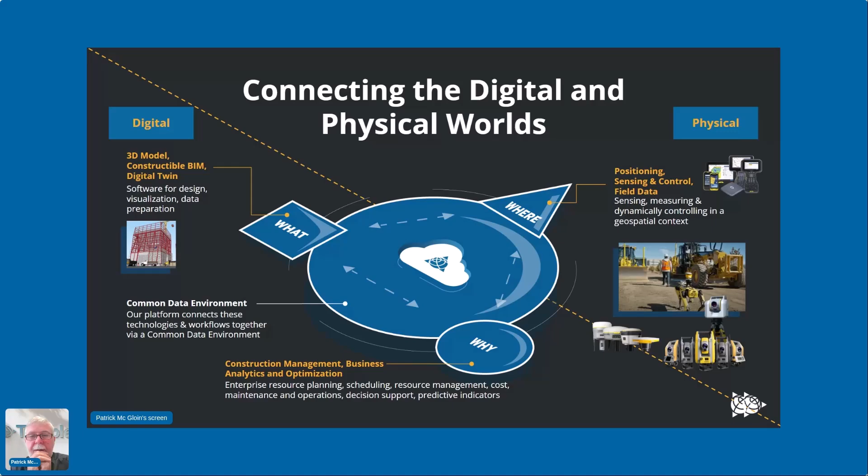Digital to physical. From Tekla Structures, data can be sent directly to fabrication to produce the design elements that are necessary, and then to ensure that those components actually fit in the field.

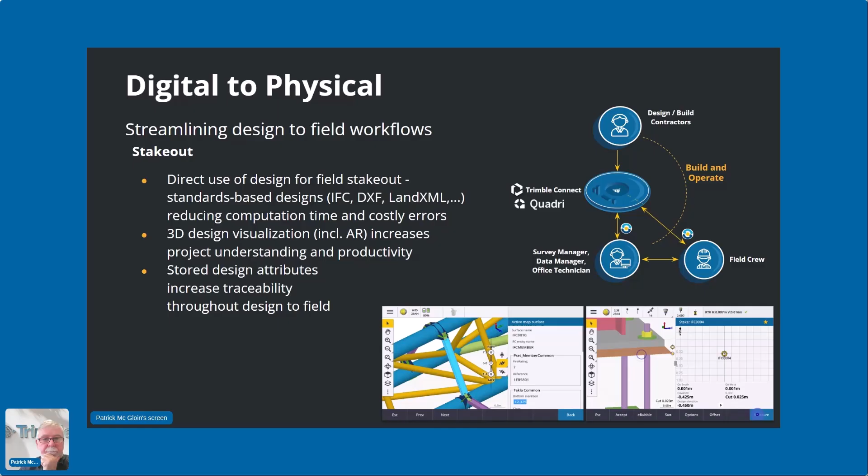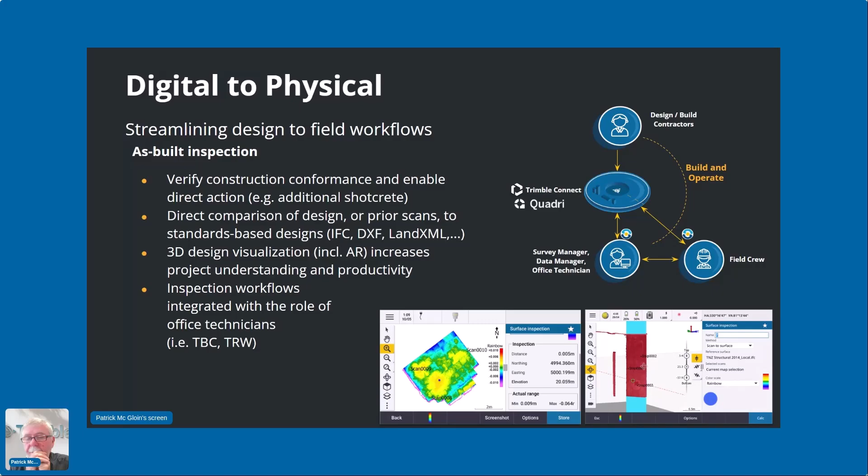Digital to physical, streamlining design to field workflows. Quality control of what we've designed as opposed to what has been built. Ensuring that the design objects that have been produced are accurately represented in the field. Sending solid information for bridges, for structures to the field, and extracting the necessary coordinates from edge lines, surfaces, or points directly from the solid objects.

And of course, this is a two-way workflow, physical to digital. As the construction proceeds, it's very important to control the data that has been, or the objects that have been constructed in the field, be it bridges, be it manholes, be it pipelines, be it cut and fill surfaces, and be able to...

...combine that with the design data, both offering augmented reality solutions, but also ensuring that the quality control of what is being constructed is in accordance with the design. Full data flow from physical to digital.

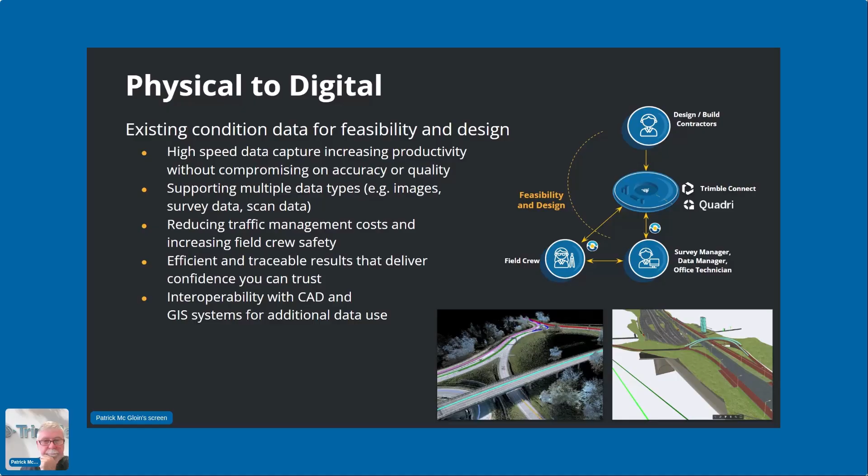And we're seeing now the use of the data, the design data, how that can augment the whole process in the field.

Offering model access of the relevant information that is necessary directly to the people working in the field. Ensuring that they're not overflowed with unnecessary data, but getting accurately the data that they need to do the job in progress, whether it's reinforcement in a building construction, or pipelines and manhole layouts in an infrastructure project. Again, ensuring that the correct data is in the correct place at the correct time.

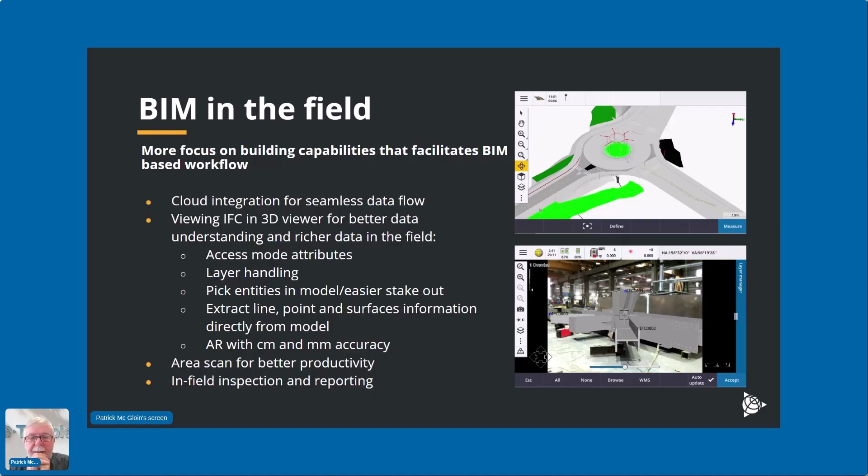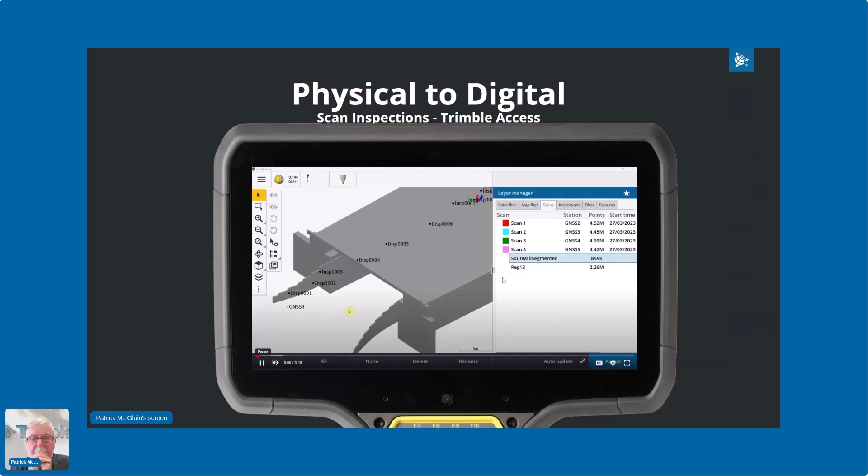Just a little example. So the ability now to accurately scan everything that's been constructed, take that scan data, add it to your model, and then control that what has been constructed is in accordance with what has been designed.

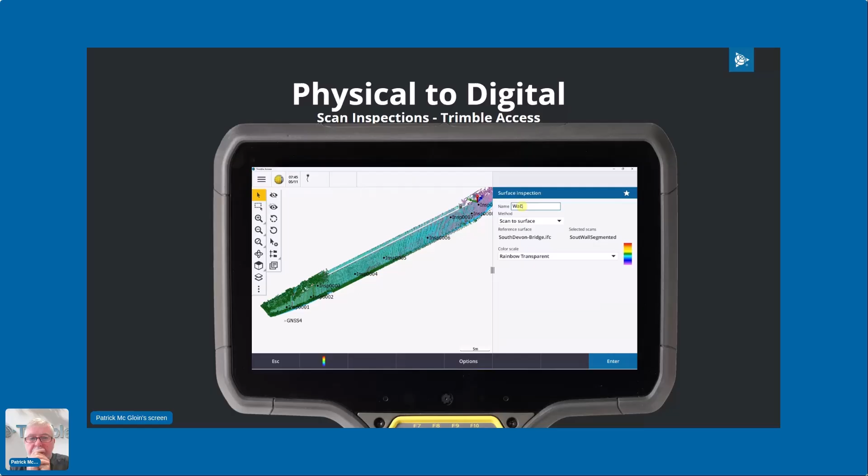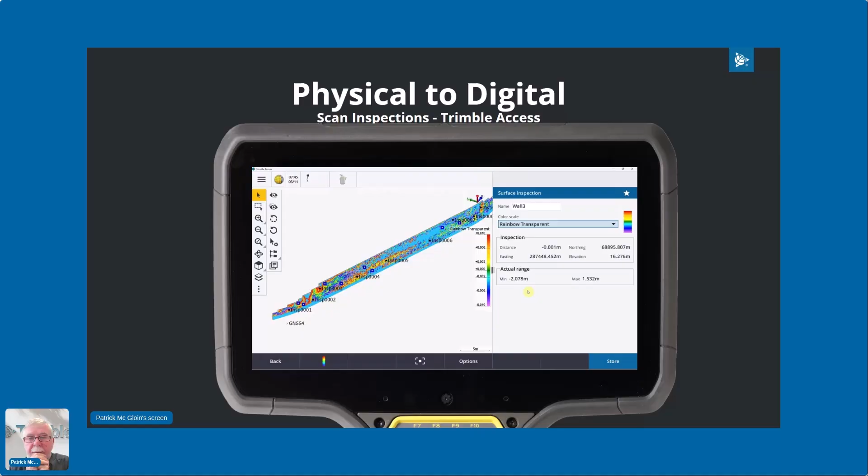And as we see this moving forward, providing the maintenance situation with models, giving them exactly the information they need. What is essential here is that the data available in the maintenance phase is of an accuracy that is required, but also easy to search and easy to visualize, so that there isn't a data overflow. The right people get the right data at the right time.

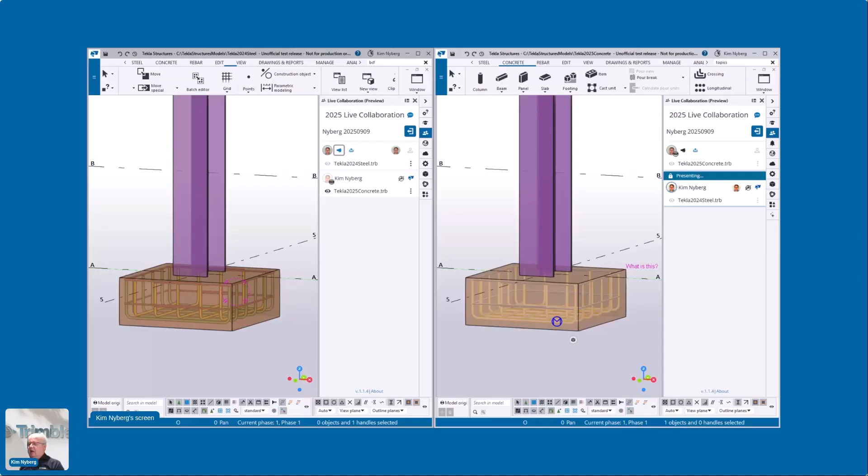One of the things we got early feedback on, I think last year, was that model sharing and live collaboration need to work together. We originally thought, why would you collaborate in real time in the same model? Because we already have a solution for that called model sharing, which allows you to work offline and then synchronize your changes.

But there was actually a need to do this as well. You could technically do it already, but the problem was that when you shared the same model in the same live collaboration session, you had your own model and then the reference model on top of each other. It worked, but it didn't look very nice. So now we've solved that problem in a service pack that came out this summer in Tekla Structures 2025.

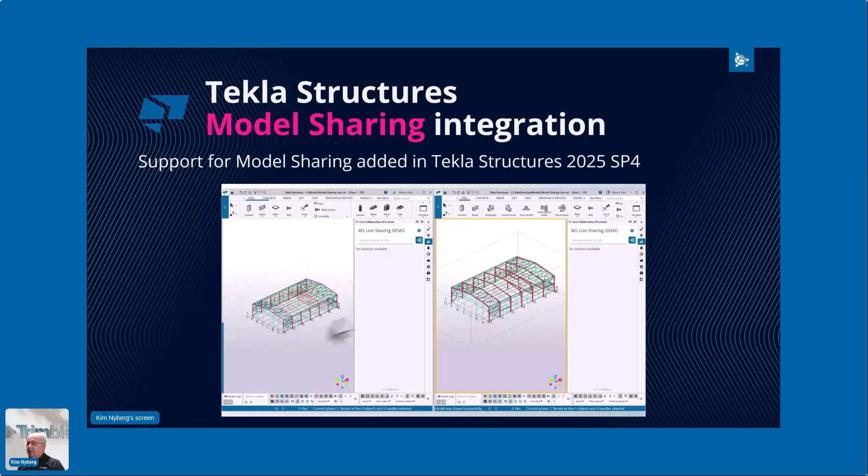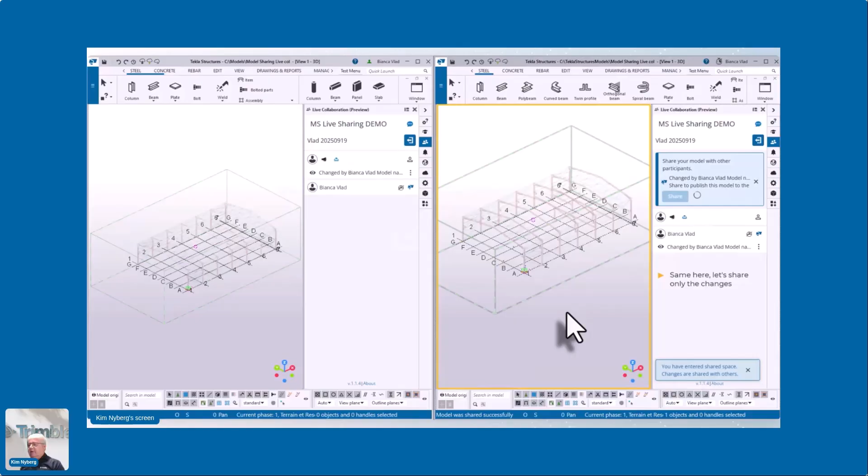I have a short video showing the concept. This shows how fast it is to start a live collaboration session, just one click, and then you decide what to share. What you can do now is share just the changes if you're working on the same model, so you see your model and then the changes the other one is doing, and vice versa, but you have your own model only once on screen.

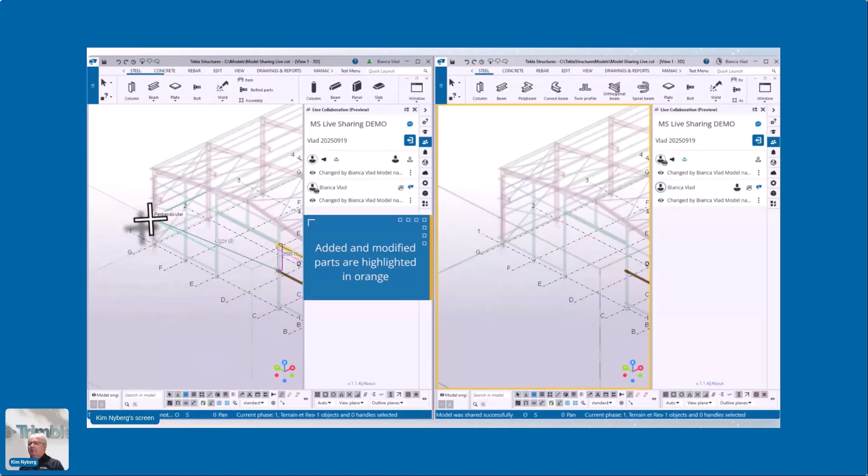Which means you have the normal camera following that you've had in live collaboration since 2024. Then you can start modeling, and now on the right-hand side you can see it did some calculations, it updated some connections, but it updates now in real time in the same model.

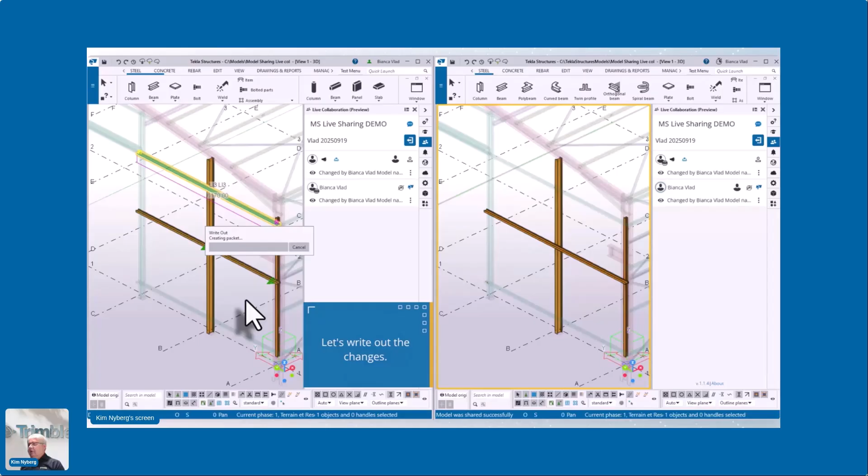But the changes are not saved to model sharing until you publish them, and you can of course turn this on and off. This allows you to work in a shared model and see in real time what other people are doing if you join a live collaboration session. Then there's a write out of the changes, save that, and once the other user does a read in, we're all in the same situation again with everything up to date.

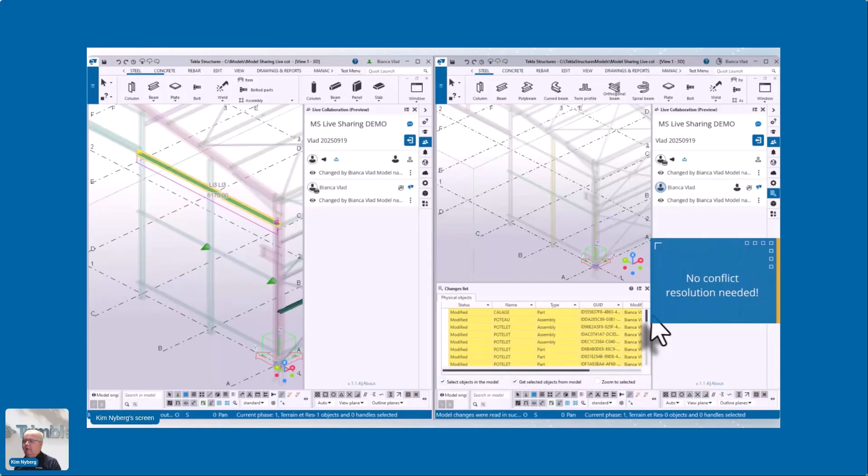This is something our customers asked for, so we delivered on it this summer. We continuously improve on this based on customer feedback, so really have a look at this technology. It's now available in 2024 and 2025, and we're pretty excited about it. When we explain the concepts and show it to our customers, they start to understand and come up with more use cases than the ones we originally thought of, for example remotely showing someone how to do detailing, or someone in the fab shop how to construct something.

Live collaboration has also been available in Trimble Connect, behind a flag as an extension. This came out already at the end of 2023. It allows you to see, from Trimble Connect, the changes in a session coming in from different Tekla Structures users. It also allows you to share static models into a live collaboration session.

Let's say you have a Revit model or a SketchUp model. You can publish those to Connect and then use them as reference models and collaborate around them. The Connect version is always a web application, only available in Trimble Connect for web at this point, so it has all the latest and greatest functionality, like sharing of clip planes, sharing of annotations, and so on.

You can edit those in real time, so that's data you can actually collaborate and change with multiple users at the same time. Of course, the latest edit wins in this case, but it's not affecting the models. Trimble Connect is not used for editing the actual model.

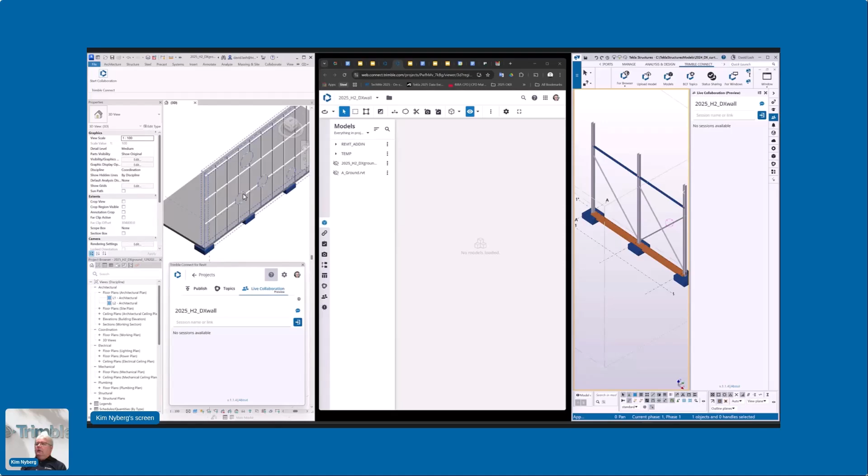On the left-hand side, let's say you have the architect joining a live collaboration session. Then on the right-hand side, we have an engineer or detailer joining from Tekla. And in the middle, you might have the BIM collaborator or coordinator or the project manager just viewing what is happening in real time.

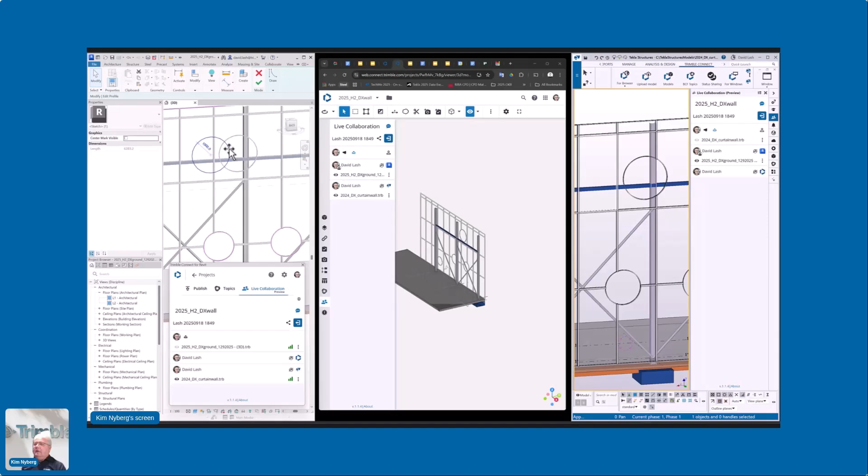Now the changes that you do in Revit show up — when you press apply, you can see the model changes both in Connect and in Tekla. And then vice versa, when you do the change in Tekla, that change is propagated to Trimble Connect and to Revit as well.

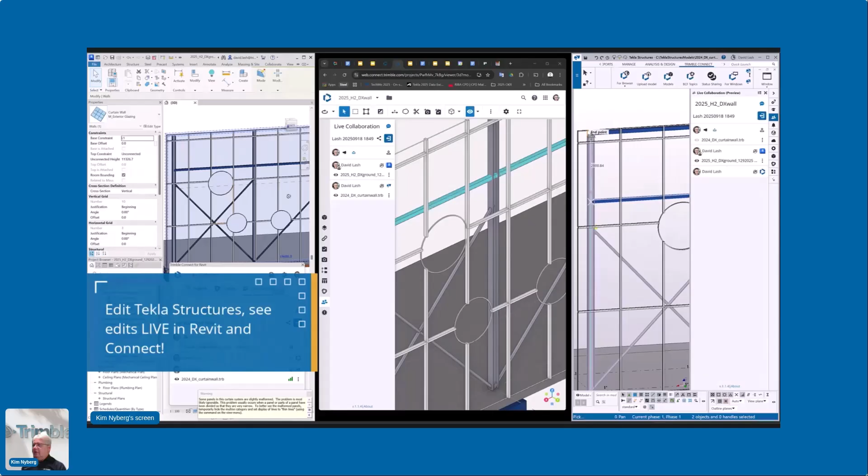And then the normal camera following and presentation mode, which forces everybody else to follow your camera so you can do a design review, for example, is available in all three environments.

So that's available now in the Trimble Connect App Store. If you have Revit and a Trimble Connect license, you can download it, install it, and start collaborating in real time with other Connect users. This works Revit to Revit as well, and of course Revit to structures, Revit to Connect.

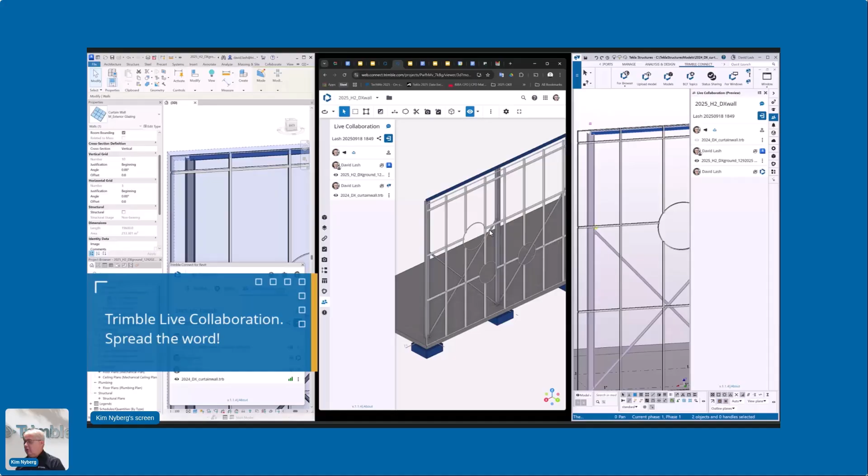Anyway, summing up the unique features — although we start to see our competitors catching up on some of these things — first of all, you share the models you want. You can select which part of the Connect project, which models, you want to share into a session. You can share markups, clip planes, measurements, object colorings, and so on.

So you can collaborate on a view and then create a BCF topic out of that once you're happy with how to present the problems to decision makers and how to solve it, for example. We have session invitation links, so you can prepare a session or set it up in advance.

Include that in your Teams meeting request, and then everybody can automatically, with one click, join a live collaboration session when the meeting starts. We do not offer audio video capabilities at this point, but rather assume users are using Teams, Google Meet, Zoom, or whatever is their choice of tool, and we integrate through these invitation links.

Then, of course, you can see the participant avatars, do camera following, enforce presentations, and maybe most importantly, you stay in your familiar tool. This differs from screen sharing because you are in your own tool, in 3D, and can navigate freely while still collaborating.

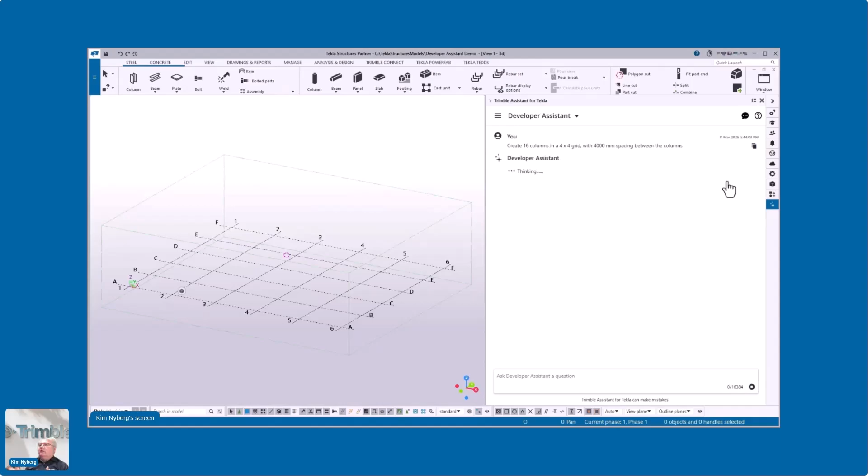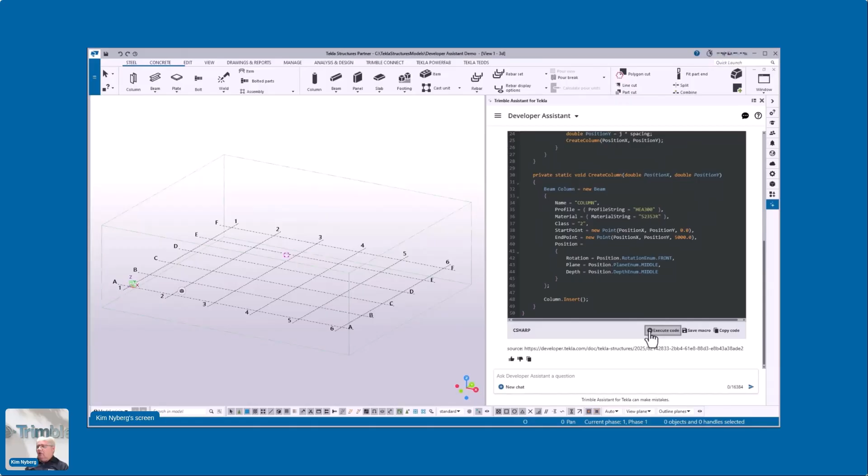Now, we have actually done agentic work, and we have actually launched agentic work already with the Trimble Assistant for Tekla Developers, or Developer Assistant, which basically allows you to use natural language to ask for code generation using the Tekla Open API.

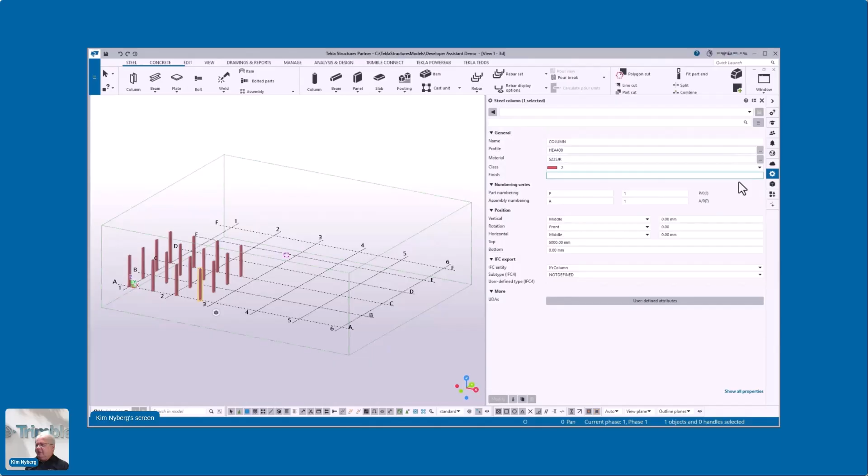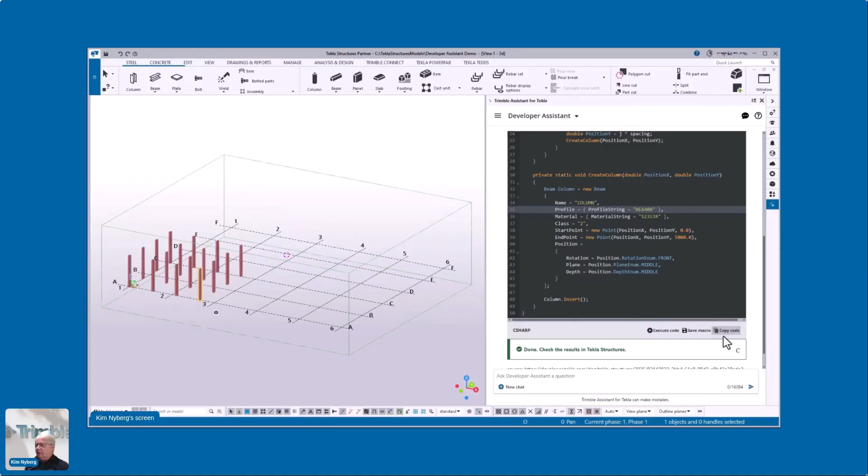Patrick mentioned that data is important, but APIs are also super important. It's really good that we've had the Tekla Open API available for extension developers for many years already. This allows you to generate code, execute it, and it does something. It might generate an error, then you can feed that error message to the agent, and it will fix the code eventually, or maybe not. It's kind of not guaranteed because of the way large language models work. And if you're happy with your result, you can save it as a macro.

One big news now is that originally we made this available for our developer partners, but starting in the latest update to Trimble Assistant, we'll make it available to all Diamond and enterprise customers. For more details, contact our salesperson or a contact person in Trimble. This allows more people to experiment with this.

This is kind of a human in the loop. We do not perform anything automatically. The human reviews the code and then executes it. But this is an example of an agentic workflow already, or an agent. And agentic workflow is basically when we combine all of these agents into a workflow. This is the next big thing that we will be working on.

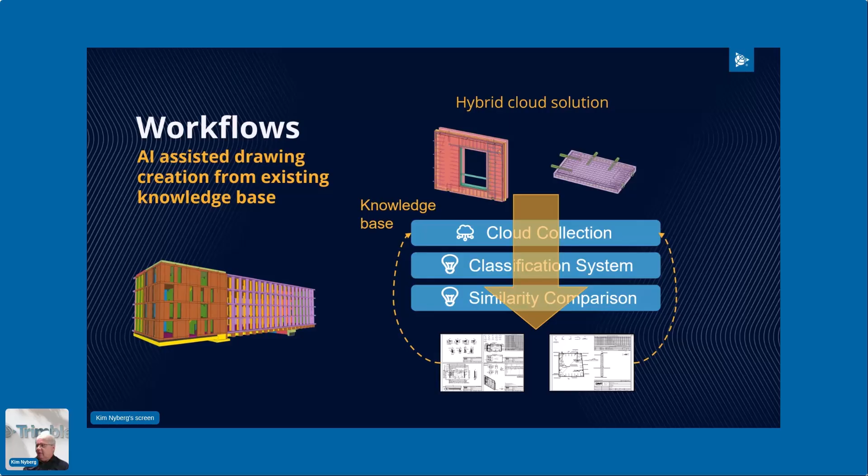Maybe a little bit of an example of this is already the fabrication drawings that we launched with Tekla Structures 2025, which allows you to produce better drawings based on previous results. So you build your own collection of drawings, and the next project can utilize all of the work that you put into refining the drawings from the previous project. You build up a cloud collection that you can then use in multiple projects. This one has been out already since Structures 2025.

Now we are building something called the Trimble Agentic Platform, because we want to have hundreds or even thousands of these agents in our products going forward. Here's an example that's fairly fresh out of the oven, still kind of internal development and so on.

There will actually be more information about this in a presentation by Anders in the afternoon, who will talk more about GeoSuite. Let's see if I had a video for this one. Yeah, I just pre-recorded an example of this.

AI assistant in GeoSuite, but the difference to the previous ones was that this was now built on our new agentic platform. And it took a very short time to do this integration, as we have now done this as a platform. We went from a year to months to just hours doing these types of integration when we have a platform that we're building.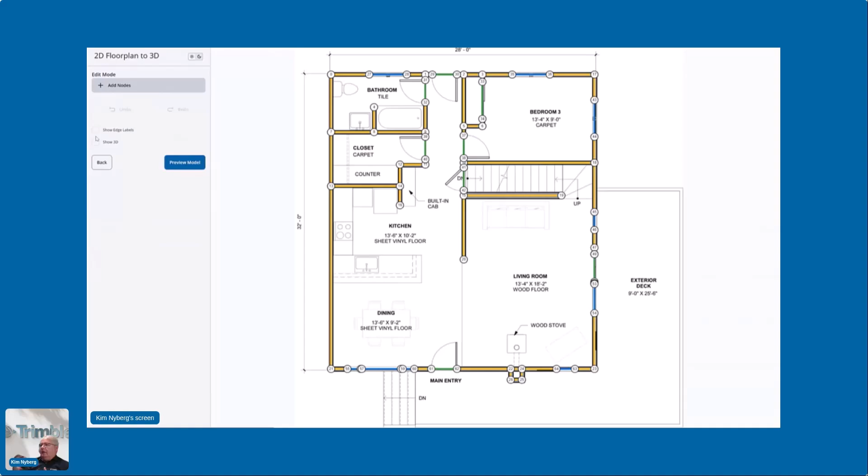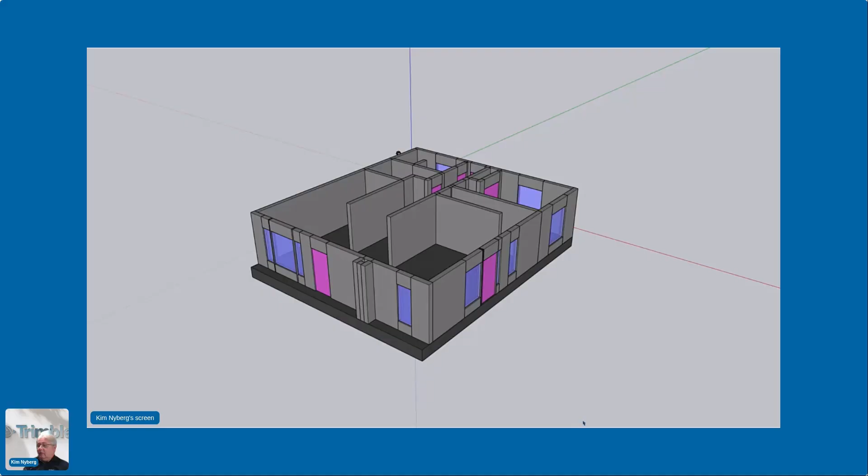Let me play the video real quick. So what it does is it allows you to upload a drawing. Then it identifies the walls, windows, doors. You can edit it, so this is kind of human in the loop. And once you're happy with the vector representation, you can generate a Trimble BIM out of that and then import it into SketchUp, into Tekla, or into Trimble Connect. So in just a couple of clicks, you get a starting point if you only have a PDF drawing or an image of a drawing or something like that. This is an example of using classic machine learning to learn about this.